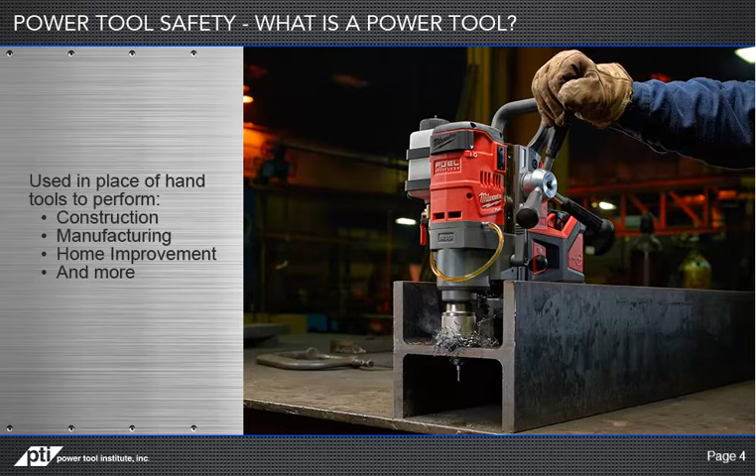General power tool safety warnings define a power tool as an electric tool which may be connected to a source of electricity by a cord or be powered by a battery. They are often used in place of hand tools to perform a variety of work, ranging from construction to manufacturing to home improvement and more.

Injuries can be prevented by exercising caution, following the instructions in the operator's manual, and using the best practices in this lesson.

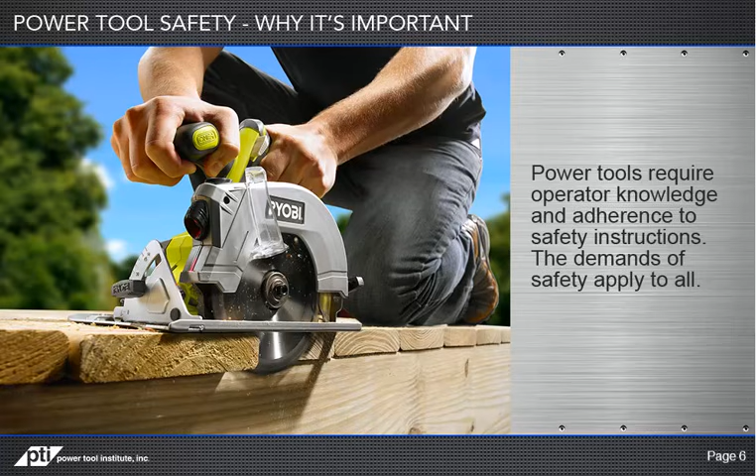Power tools require operator knowledge and adherence to safety instructions. They must be used sensibly and kept in safe operating condition, whether they are in the hands of a professional tradesman, a beginning do-it-yourselfer, or a vocational student. The demands of safety apply to all.

The material presented here is a compilation of specific power tool warnings. The purpose is to highlight some of the safe use requirements of specific tools. The general safety warnings and instructions offer a basis for safety.

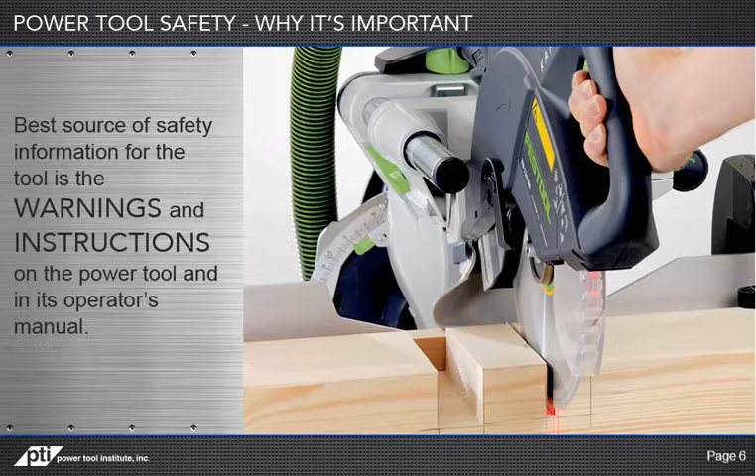The warnings and instructions on the power tool and in its operator's manual provide the best source of safety information for the tool. Read and understand the contents and follow all warnings and instructions for each specific power tool and all related accessories. This is essential to the safe operation of any power tool.

Power tools can be dangerous if all safety warnings and instructions are not followed carefully. General safety warnings and instructions apply to power tools, both corded and cordless. Please note that cordless power tools, chargers, and batteries may require additional safety measures. Review the operator's manual for more details.

Following good safety practices when using all power tools is a must. Make a habit of including safety in all your activities. Do not underestimate how quickly an accident can occur if proper safety practices are not followed.

Proper power tool inspection involves looking at the tool before turning it on or using it. Before using a power tool, ask yourself: are moving parts misaligned or binding? Are all parts, including guards and accessories, in place? Is anything broken or loose? And are all parts, batteries, and accessories manufacturer recommended?

Damaged tools, batteries, accessories, or tools with missing or malfunctioning parts or accessories must be fixed or replaced before using them. Develop a maintenance schedule for your tool.

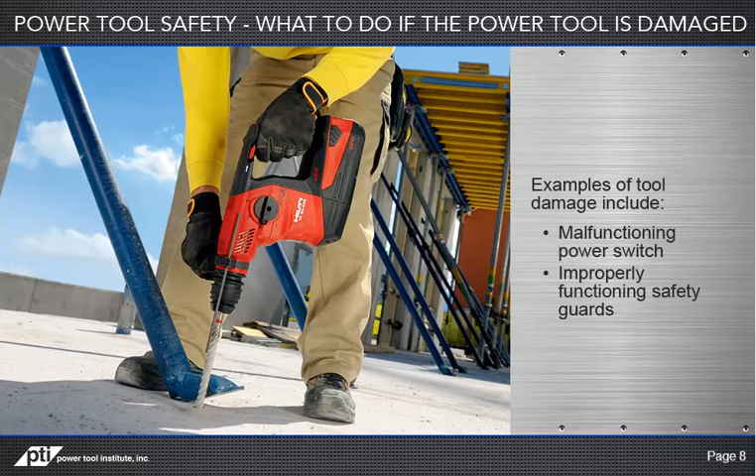Examples of a damaged tool include malfunctioning power switches and improperly functioning safety guards. If a power tool is damaged, do not use it, and take it to be serviced by a qualified repair center. Service or maintenance performed by unqualified personnel or use of inferior parts or accessories could result in a risk of injury. Use only manufacturer-recommended parts.

Before using power tools, always read and understand the tool's operator's manual, tool markings, and the warnings and instructions packaged with the tool or accessory before starting any work.

Start with a safe work area. Keep your work area clean and well lit. Cluttered benches and dark areas invite accidents.

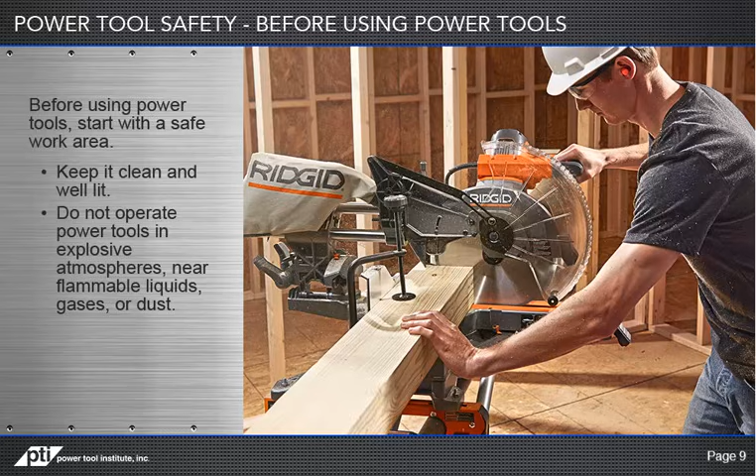Do not operate power tools in explosive atmospheres, near flammable liquids, gases, or dust. Power tools create sparks, which may ignite the dust or fumes. Keep bystanders and children away when using a power tool. Distractions can cause you to lose control.

Practice electrical safety. Grounded tools with three-pronged cords must be plugged into a properly grounded outlet. Never remove or cut off the grounding prong, or modify the plug in any way. Do not use any adapter plugs.

Double insulated tools have a polarized plug where one blade is wider than the other. This plug will fit into any outlet only one way. Do not change the plug in any way. And do not use AC-only rated tools with a DC power supply.

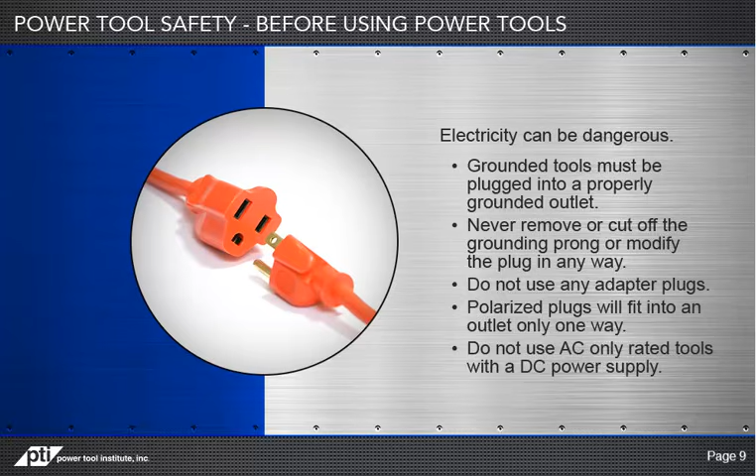The wire gauge and length of the extension cord must be able to handle the amps of the tool. Find the amps on the tool's nameplate and use the chart from the operator's manual to determine the necessary wire gauge for your extension cord length.

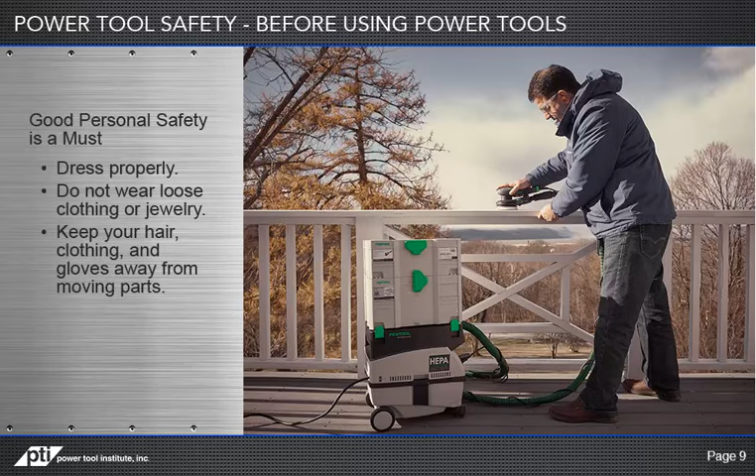Practice personal safety. Dress properly. Do not wear loose clothing or jewelry. Keep your hair, clothing, and gloves away from moving parts. Loose clothes, jewelry, or long hair can be caught in moving parts. Remove adjusting keys and wrenches before turning the tool on.

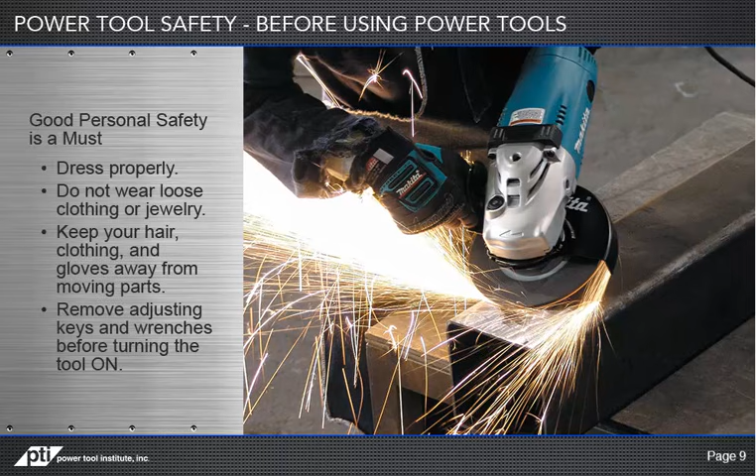After proper preparation, it's time to use your power tool. Remember, electricity can be dangerous. When using a power tool, don't touch grounded surfaces such as pipes, radiators, ranges, and refrigerators. There is a higher risk of electric shock if your body is grounded.

Don't use or leave power tools or batteries in the rain or wet conditions. Do not abuse the cord, carry the tool by its cord, or pull the cord to unplug it. Keep the cord away from heat, oil, sharp edges, or moving parts. Replace damaged or worn cords immediately.

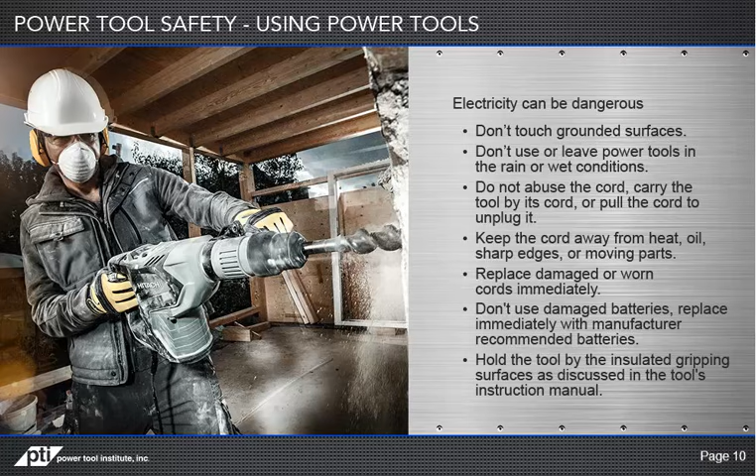Don't use damaged batteries. Replace them immediately with manufacturer-recommended batteries. Always hold the tool by the insulated gripping surfaces. This also applies to battery-operated tools. Contact with hidden wiring or a tool's own cord will make exposed metal parts of the tool live and shock the operator. Use extension cords properly.

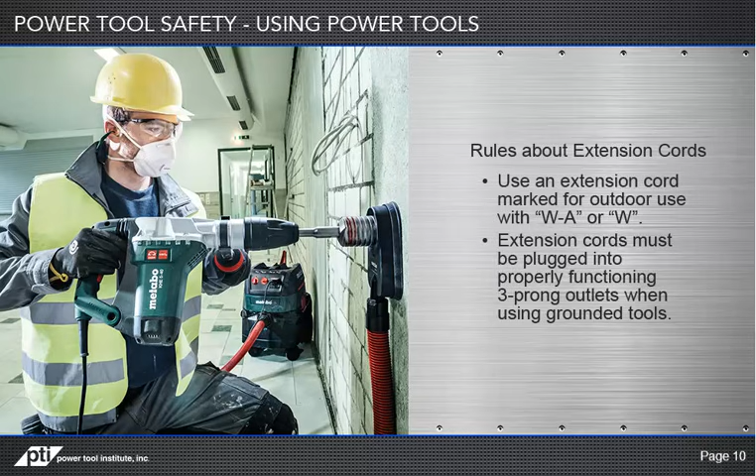When using a power tool outside, use an extension cord marked for outdoor use with WA or W. These cords are made for outdoor use. Extension cords with three-prong grounding plugs must be plugged into properly functioning three-prong outlets when using grounded tools.

Follow these personal safety and work habits best practices. Stay alert, watch what you're doing, and use common sense when using a power tool. Do not use tools when you are tired or under the influence of drugs, alcohol, or medication. Keep handles dry, clean, and free from oil and grease.

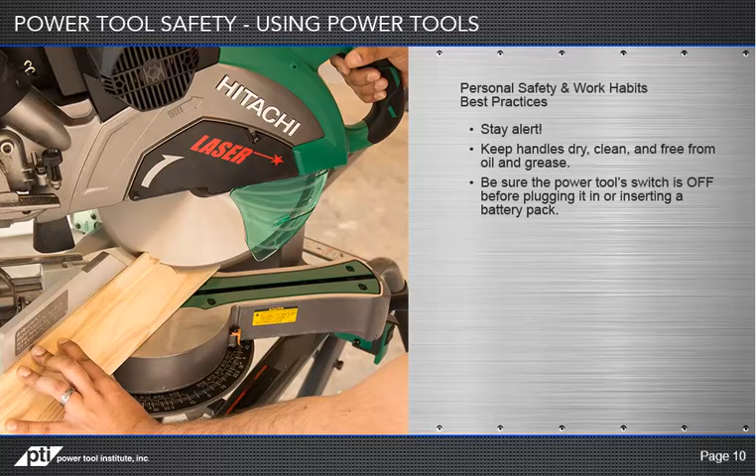Be sure the power tool switch is off before plugging it in or inserting a battery pack. Do not carry tools with your finger on the switch. Unplug the tool and remove its battery before changing accessories, performing any maintenance or adjustment on the tool.

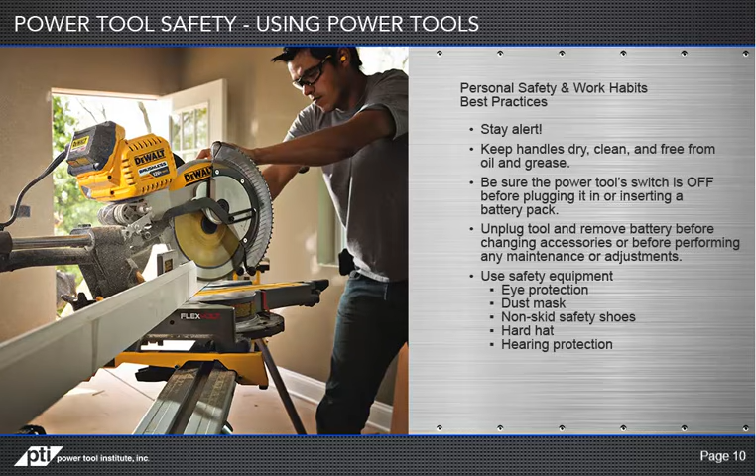Use safety and personal protective equipment. Always wear eye protection. A dust mask, non-skid safety shoes, hard hat, or hearing protection must be used when specified in the operator's manual. Do the job safely.

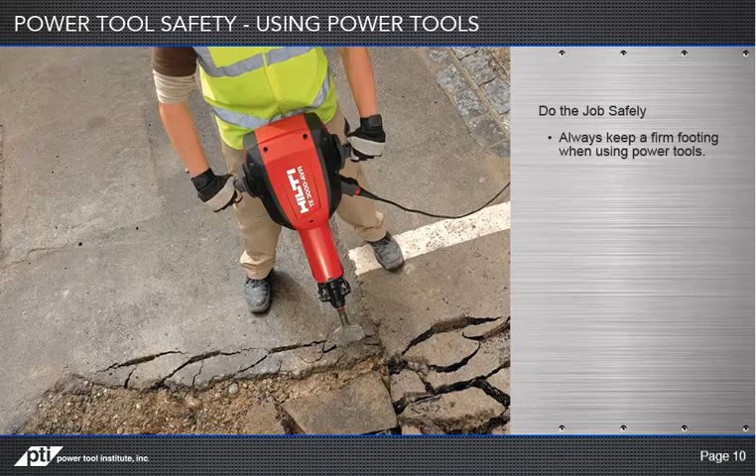Always keep a firm footing when using power tools. Be sure you have balance and control before you start the job. Use the power tool accessories only for the jobs for which they were designed.

Secure and support the workpiece. Use clamps and a stable work surface. Do not hold the work by hand or against your body. Keep hands away from rotating or moving parts.

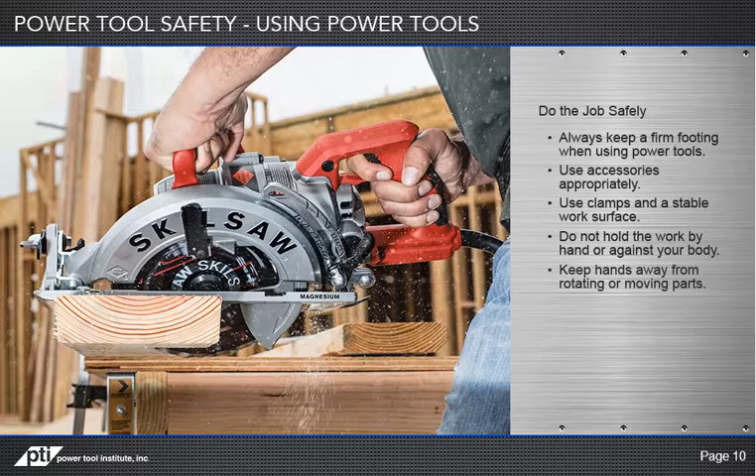Do not touch the drill bit, blade, cutter, or the workpiece immediately after operation. They may be very hot and may burn you. Use 2 hands on the tool when recommended by the operator's manual.

Keep guards in place and working properly. Do not force the tool. Use the right tool for your job. It will do the job better and safer.

Use only accessories recommended by the tool manufacturer. Accessories that may be suitable for one tool may become hazardous when used on another tool. Use only batteries recommended by the tool manufacturer. Use of batteries not recommended by the manufacturer can result in fire or explosion.

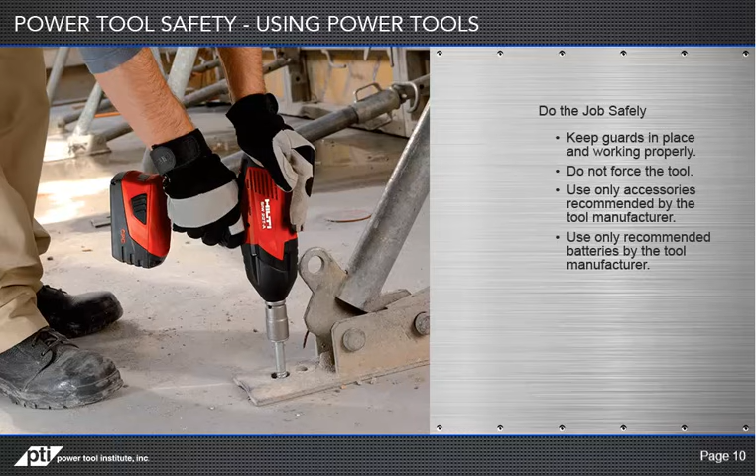If a method of dust collection is available with the power tool, it should be used to reduce the risk of dust-related hazards.

After you're done using your power tools, you must store them out of harm's way. Store battery packs away from other metal objects like paper clips, coins, keys, nails, screws, or other small metal objects. These things can make a connection from one terminal to the other, shorting the battery terminals together and causing burns

or fire. To avoid accidental starting, unplug the cord, remove batteries, or lock off the switch when the tool is not being used. Keep tools out of the reach of children and people unfamiliar with the tools.

Power tools are an investment. Effective maintenance will ensure safe use for future work. Follow instructions regarding maintenance in the tool's operator's manual.

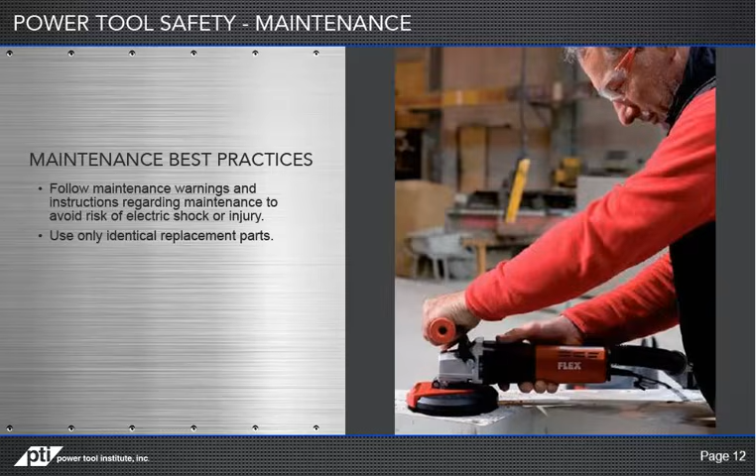When maintaining a tool, use only identical replacement parts. Use of unauthorized parts or failure to follow the maintenance warnings and instructions may create a risk of electric shock or injury. Clean and lubricate a tool only as directed in its operator's manuals. Certain cleaning agents such as gasoline, carbon tetrachloride, and ammonia may damage plastic parts.

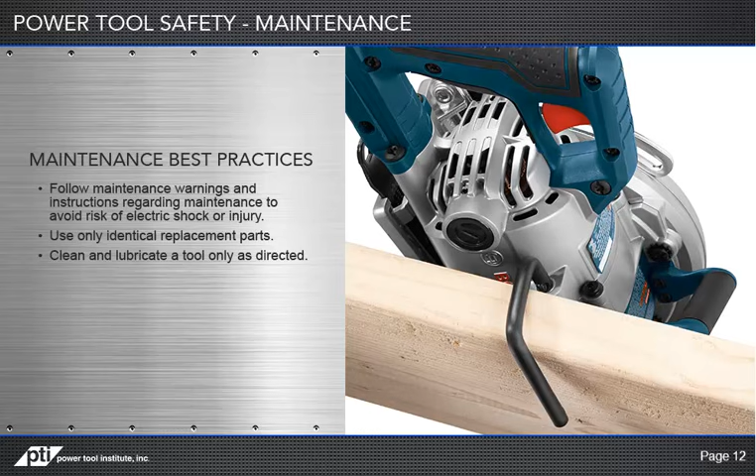Maintain labels. These carry important information. If unreadable or missing, contact the manufacturer for a replacement. Maintain accessories. Keep blades and bits sharp and clean. Check abrasive wheels for chips and cracks. Do not use a damaged wheel.

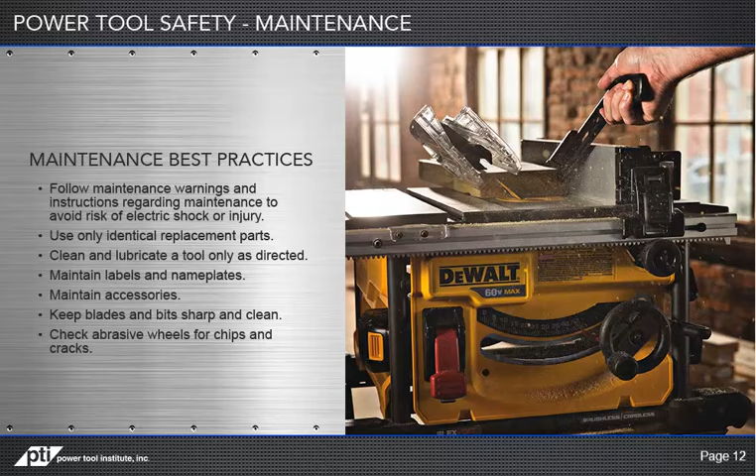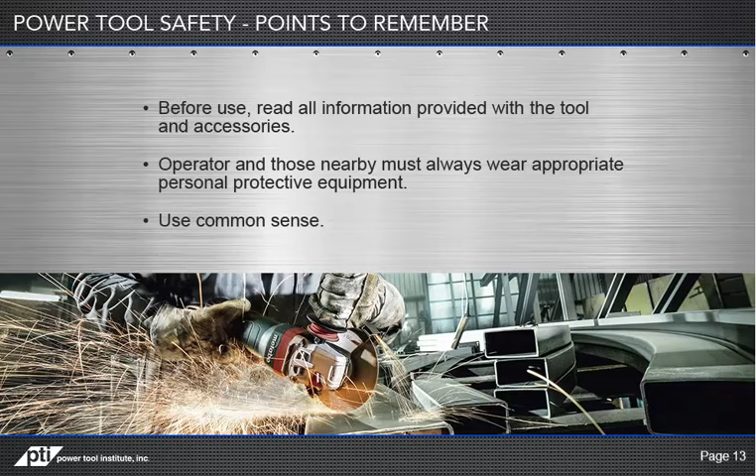The safe and proper use of power tools and accessories will ensure you are able to complete work tasks while avoiding the risk of injury. Follow the safety instructions and best practices presented in this lesson. When in doubt, refer to your tool's operator's manual. Remember that injuries and property damage can be prevented by exercising caution when using power tools.